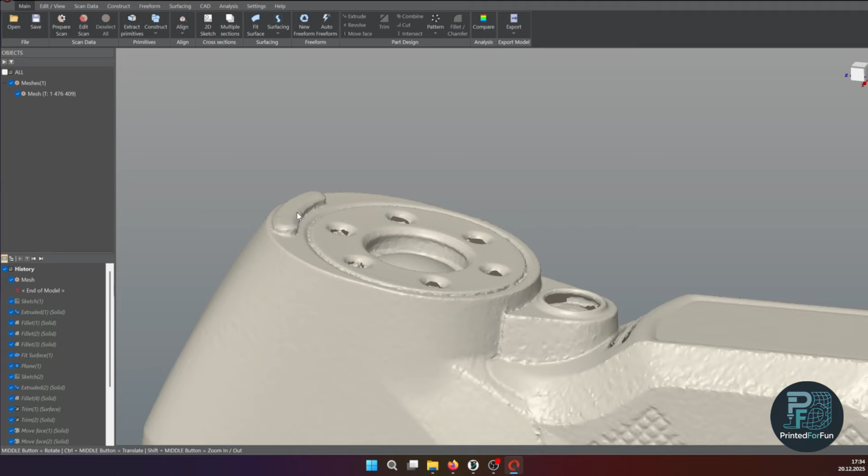Normally it has these rubber protectors, so the lenses are protected and the scanner doesn't hard crash into the table. But I want to have a larger area where I place it on the table, so it is a bit more stable in this upright position, and the result will be printed from TPU.

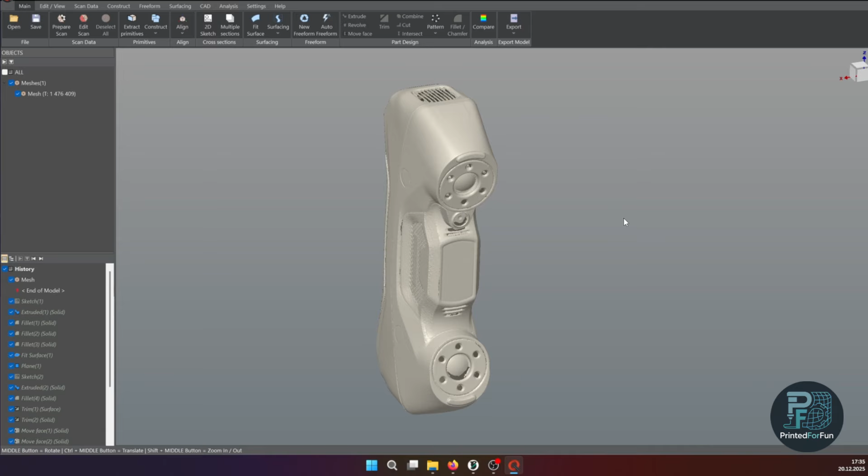I initially tried to record my reverse engineering process, but I got a bit fed up, to be honest. I had to concentrate on narrating my whole process, and this made it quite difficult to really focus on the engineering part, so I made some mistakes or did some useless work. I decided to start over — I wasn't happy with the result, so I started over, did the reverse engineering, and then recorded a narrated story of how I came to my result.

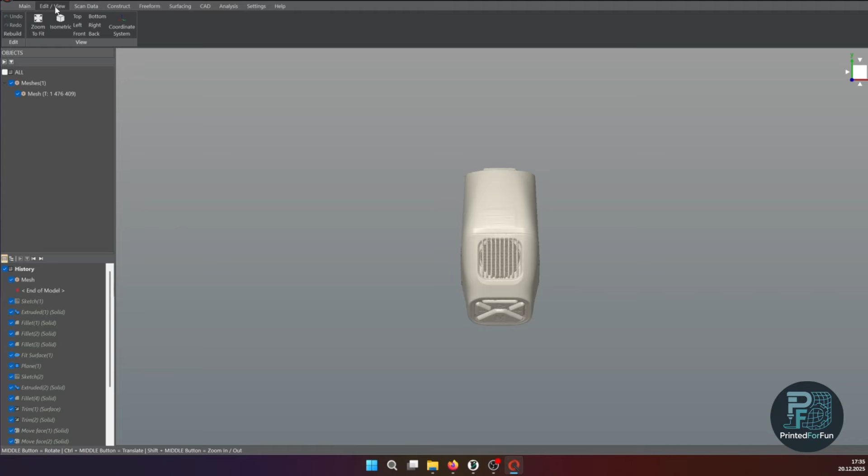As you can see, I start with the 3D scan of the MetroY Pro. It is already aligned to the coordinate system, and what's also quite important, if you look at the coordinate system, I actually set two symmetry planes.

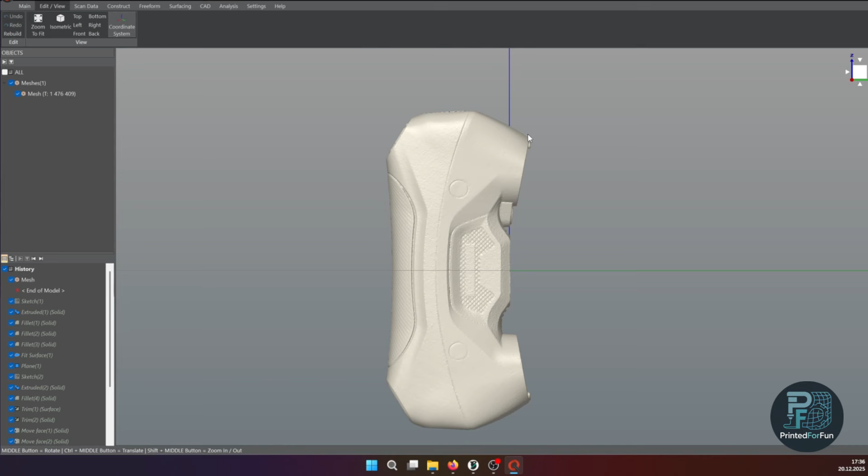So the left and right side of the scanner are symmetric, and the top and bottom are symmetric. This simply makes it easier for the construction, since the top and bottom are symmetric — I only need to construct one of them and then mirror it.

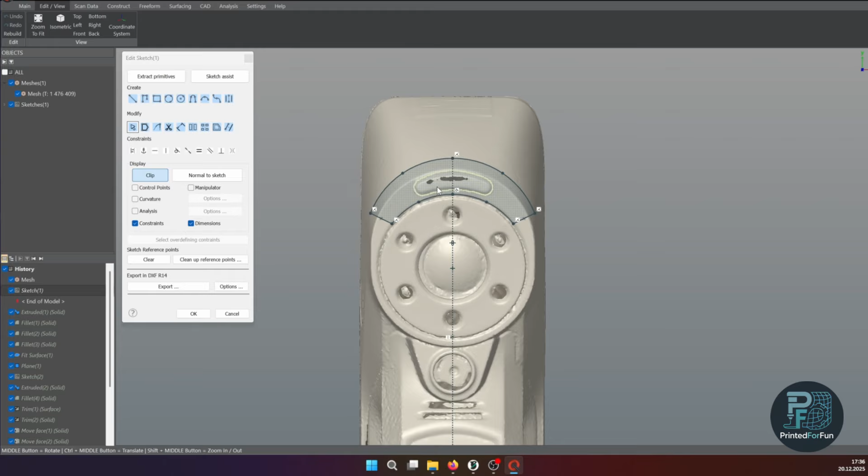First step was making a sketch. This sketch will define the rough shape I want for the MetroY, or for the lens part, or placeholder. It was important for me to follow this natural curve on the inside and outside, and include the original rubber standoff, so it isn't just based around it — I want it to be included.

The final result will be glued to the scanner with some reversible double-sided tape. This is commonly used in phone repair. It's roughly 0.1 to 0.2 millimeters thick.

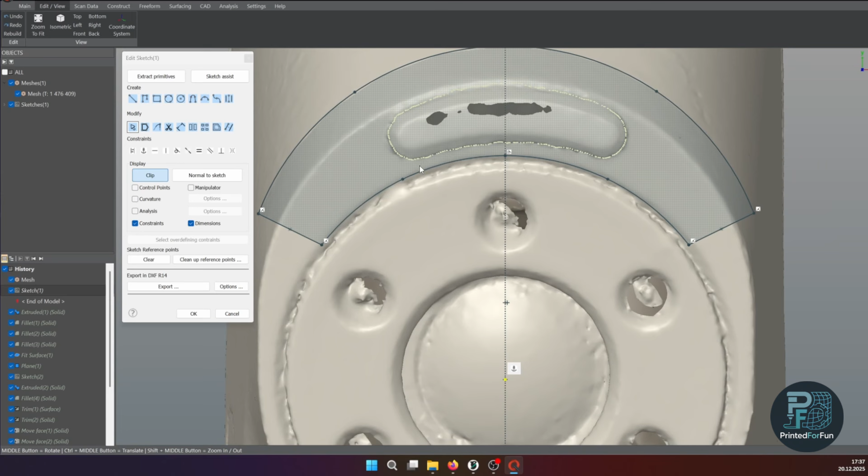What's also quite important for the result to look nice is that the center points of these arcs are placed on the symmetry line, so when mirroring the result, I get a nice smooth curvature. I don't have additional edges added in.

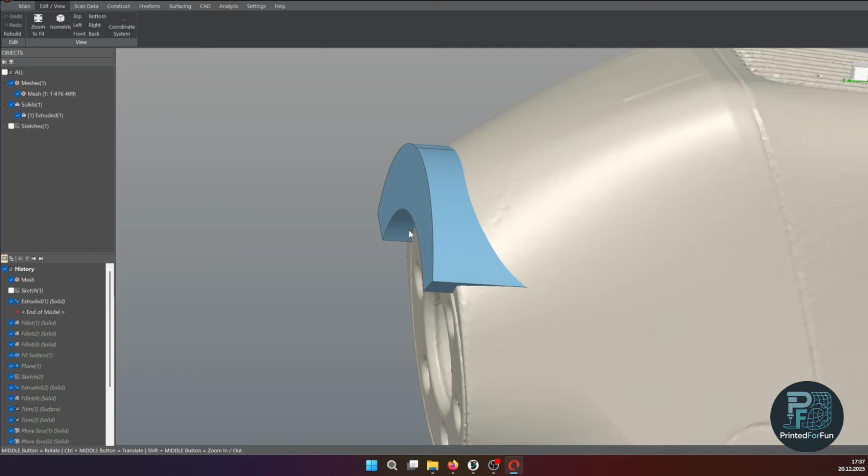The next step is extruding the lens protector. If I go to the analysis tab, you can see I extruded it to roughly 0.5 millimeters over the original standoff, so it is included and I don't have a cutout. On the side, I also extruded it past the original scanner.

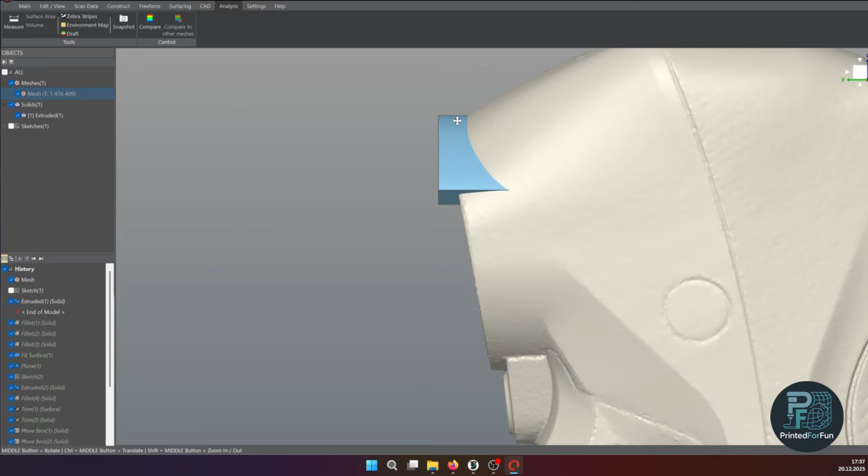This will simply allow me to cut this part with the original scanner surface, so I get a nice cutout. So we'll reverse the transparency now.

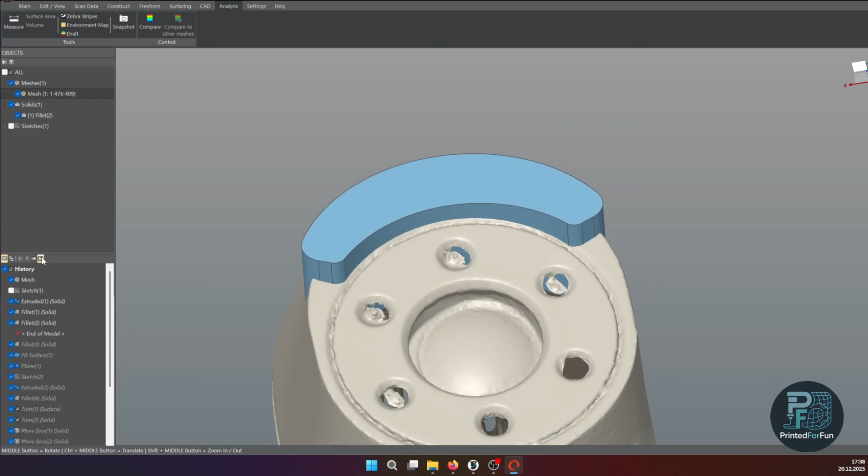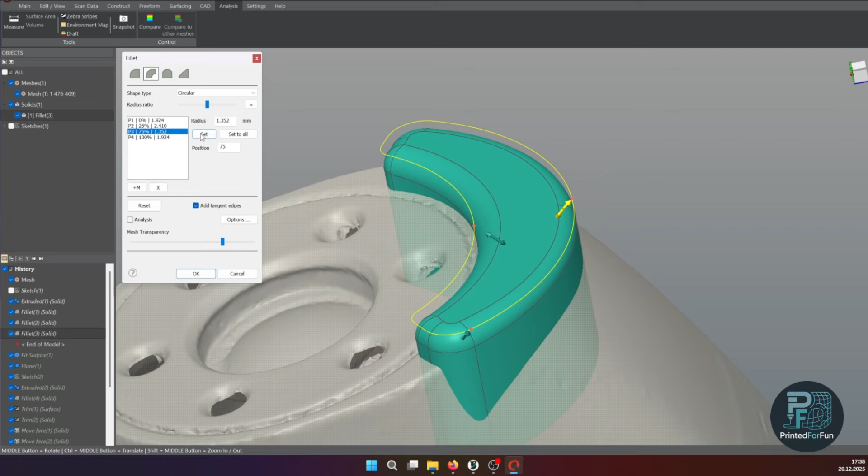Next part is more like filleting — I'm just adding multiple fillets here. In the new Quicksurface 2026 version, it also added adaptive fillets, as I'd call them, where you can have multiple radii. As you can see, the outside radius is at 1.3 millimeters and the inside is at 2.4 millimeters. This simply makes the result a bit more optically appealing, I would say.

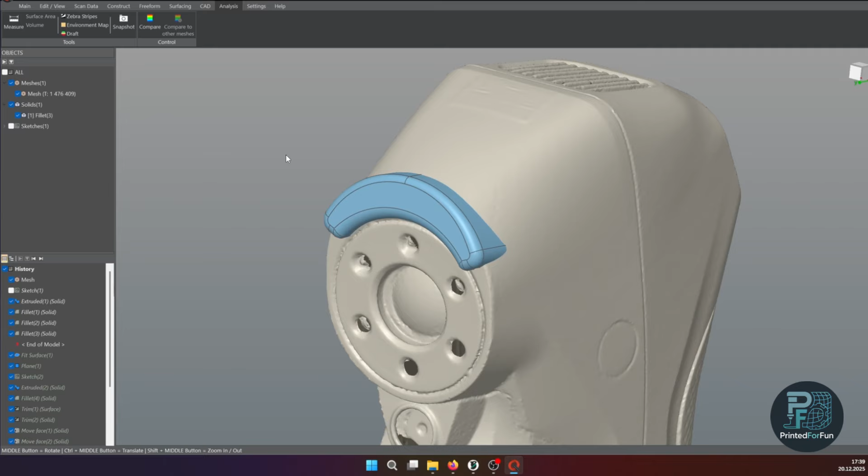This is new in the 26 version. Just recently, before recording this video, I tried to open the model in the 2025 version of Quicksurface, and it would not open correctly — it opened, but I had some errors since it doesn't support this type of fillet.

I'm also happy to announce that, at least for me, Quicksurface hasn't crashed since the update to 26. I was formerly on 25, and sometimes with very large trims or complex filleting workflows, Quicksurface would crash. I actually spoke to the guys at Quicksurface at FormNext.

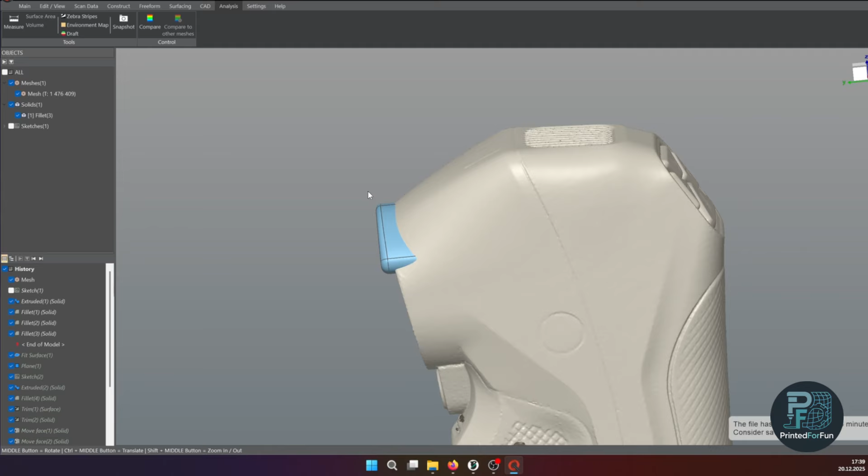They're supposedly using a whole new CAD kernel, I would say. From my IT background, it sounds like they changed the CAD kernel, like changing the Linux kernel.

Okay, so next step is quite interesting, I would say. So now let's hide the first solid.

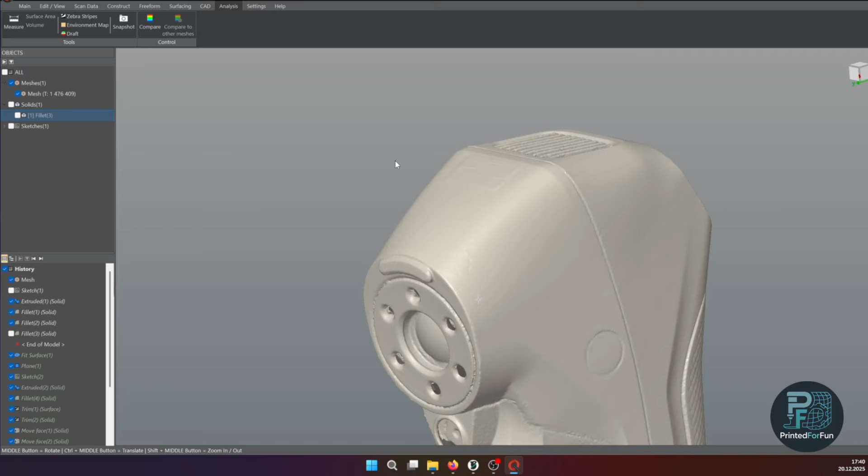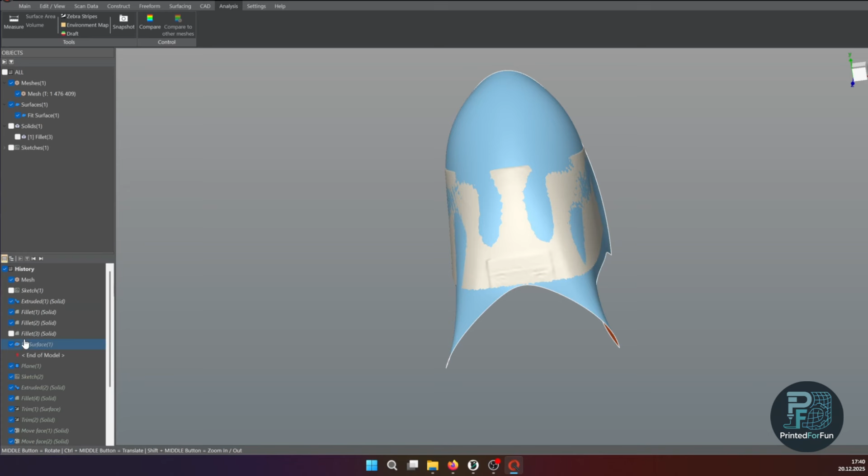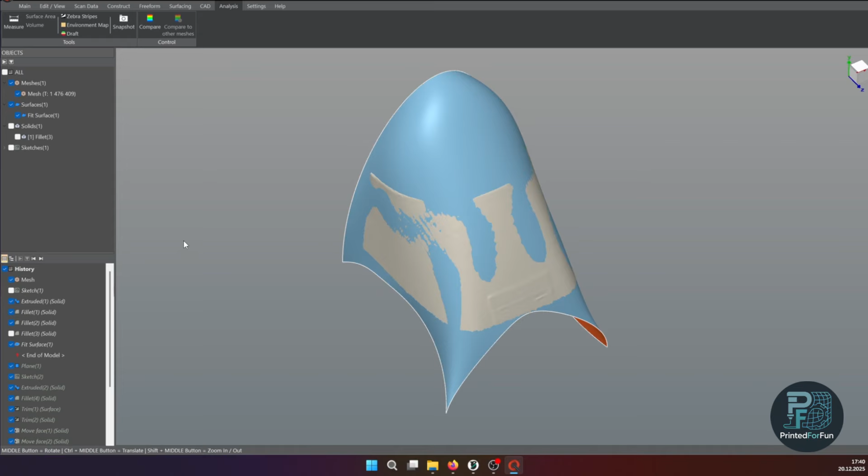My next goal is recreating the shape of the scanner to cut from a solid. For this, I isolated the scanner shape, or the relevant parts for me. In the first step, I created a fit surface over this part. Fitting a surface is actually quite easy—you select the area interactively, and say fit me a surface over this selected part, within 0.1 millimeters of tolerance. It tries its best, and for the relevant parts here on top, it reached this tolerance. Next step is fitting a plane here on the top.

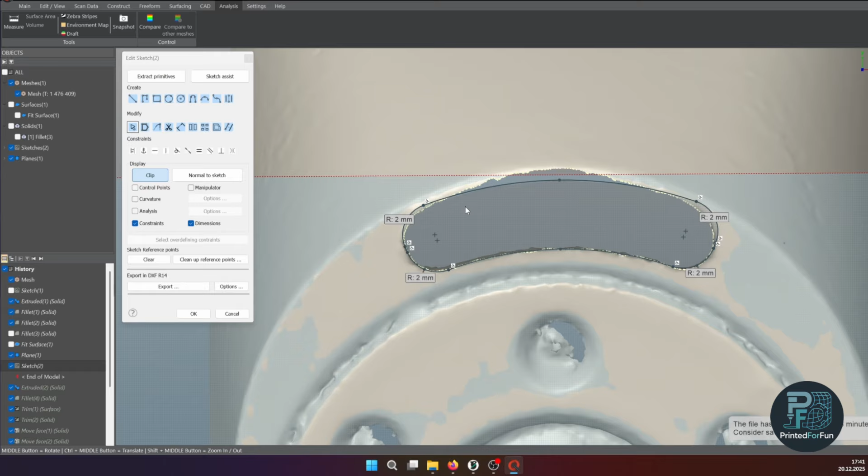I also created a sketch through the mesh. This sketch will reconstruct the original rubber, since I don't want to pry it off. I guess it could be pried off, which would have made the construction easier, but it wasn't necessary in my opinion, and it still worked without prying it off or damaging the scanner.

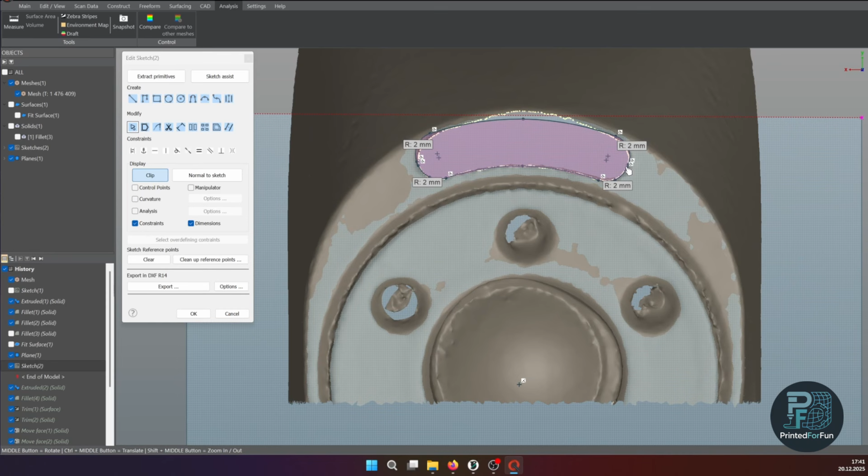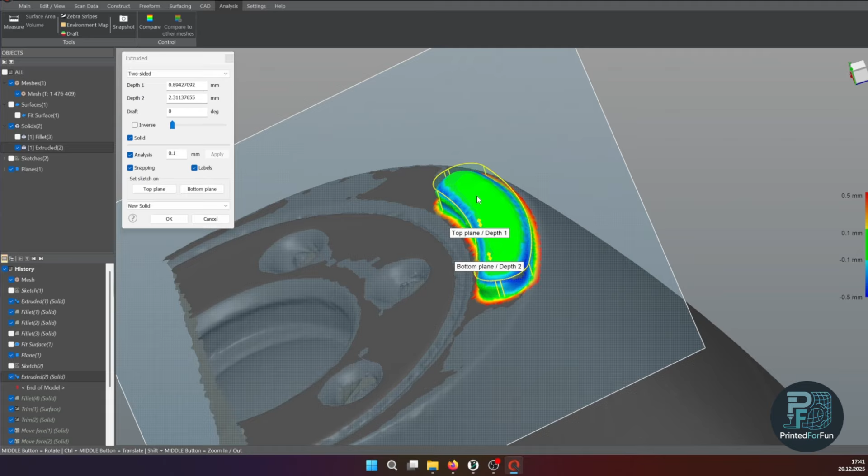So these are basically two arcs I fit around the points, and on the side I added two lines, then dynamically created the rest. This now gets extruded, also by using the snapping mode. Snapping is quite nice—you can simply enable it and it will stick to the scan data. But I don't want to change this now.

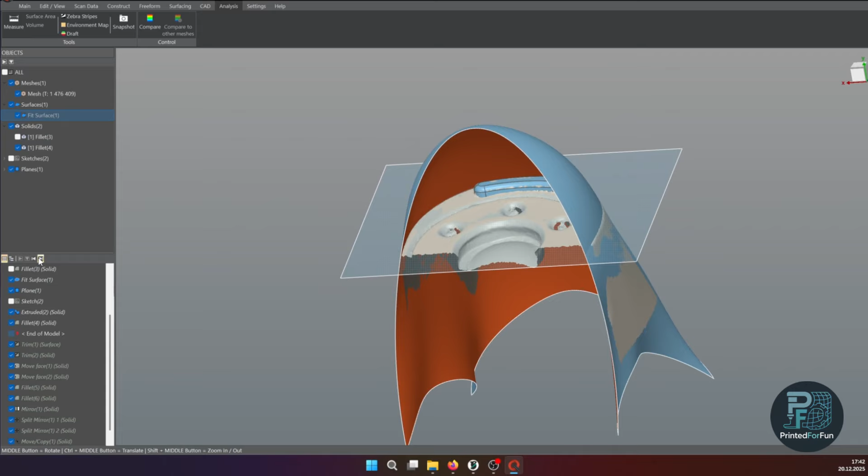Then I will fillet this extruded part to more closely fit the original rubber part. In the next step—one of the key features of Quicksurface—I trim. With trimming, I recreated the scanner shape that I want to cut from my other part. If you look at the comparison, I'm within 0.1 millimeters of tolerance, and generally for 3D printing, I'm fine with 0.1 millimeters.

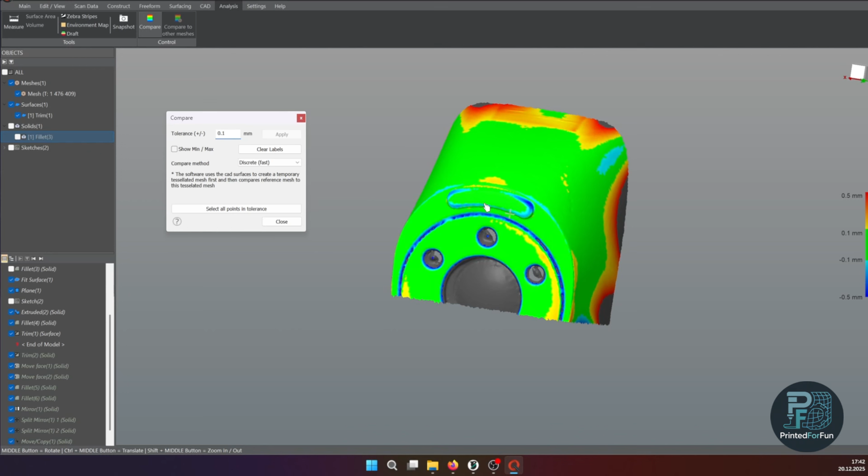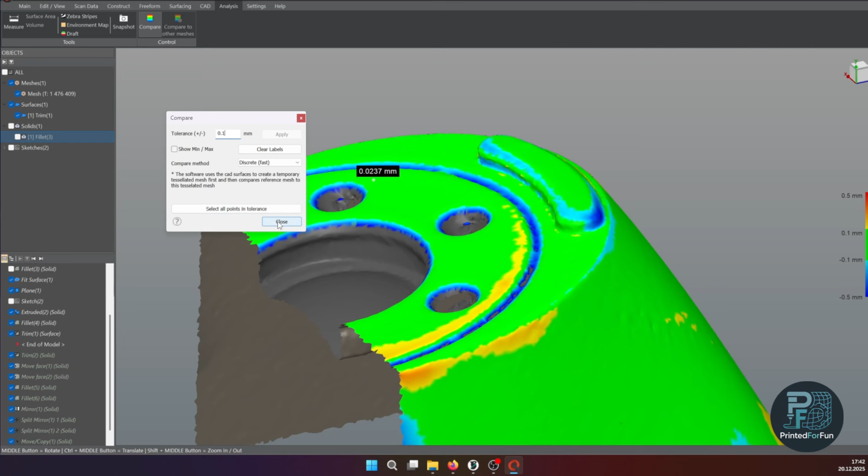Keep in mind, what's relevant are the red or yellow spots, as you can see here. The blue spots are where the CAD part or surface is actually above the mesh. So this will be more like a cutout in my final printed part, not a protrusion I don't want that interferes with the print. It will be printed from TPU, so there's a bit of give to the part.

Then in the next step, I trim again to come up with the lens protector shape. I'm just currently noticing I could have also used a draft extrusion for the protector itself to capture this nice arc of the scanner a bit more. But it worked without it, and now I don't want to reprint the whole part and reglue it to my scanner. Maybe it will be done in the future.

So what will I do next? Since I'm gluing the 3D print to the scanner with double-sided tape, the tape has some thickness. From my experience, roughly 0.1 millimeters of gap is quite nice, since the tape is a bit more, so I get a bit of friction. So I move the faces, the relevant faces, by 0.1 millimeters.

That's also quite nice about the new Quicksurface version. With the 25 version, this wasn't possible in Quicksurface, so I always had to export it to Fusion. But yeah, that's quite nice for me now.